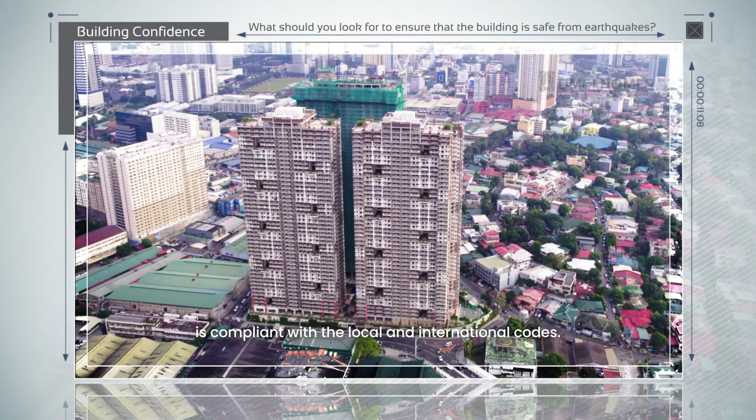The buyer should ensure that the property is designed by a reputable licensed structural engineer, and at the same time, dapat built din siya ng isang experienced and licensed property developer to guarantee that the structure is compliant with the local and international code. How high is the magnitude yung kaya ng residential building?

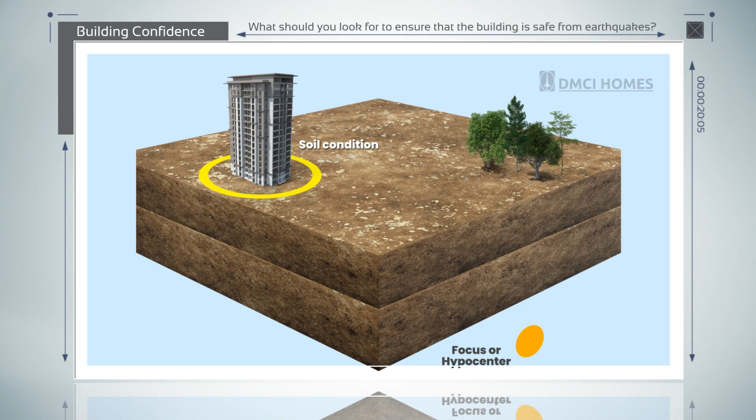What's the National Building Code of the Philippines? That's PD 1096. Up to now, it's still the prevailing national code of the Philippines. Yung purpose of the National Building Code, number one, is to safeguard life, property, yung public welfare ng mga tao. And of course, to provide yung minimum requirements for us to be able to regulate and control yung design.

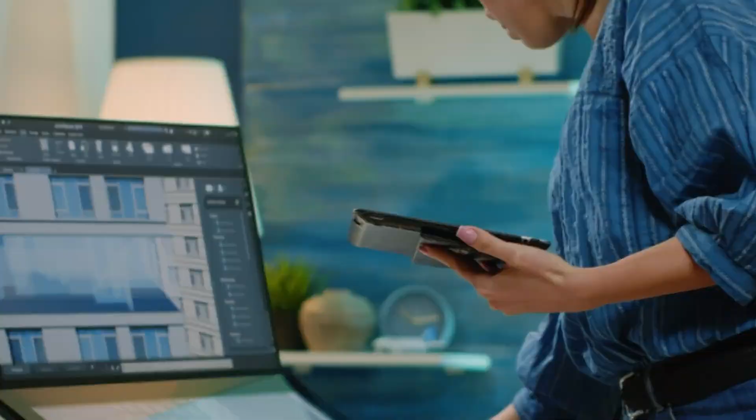What is the difference between the NBCP and NSCP? Yung National Building Code embraces everything. May maliit na part doon about the structural, the NSCP. The NSCP is the main referral code used in structural design of a building and even on vertical structures here in the Philippines. It contains provision to seismic resistant structures.

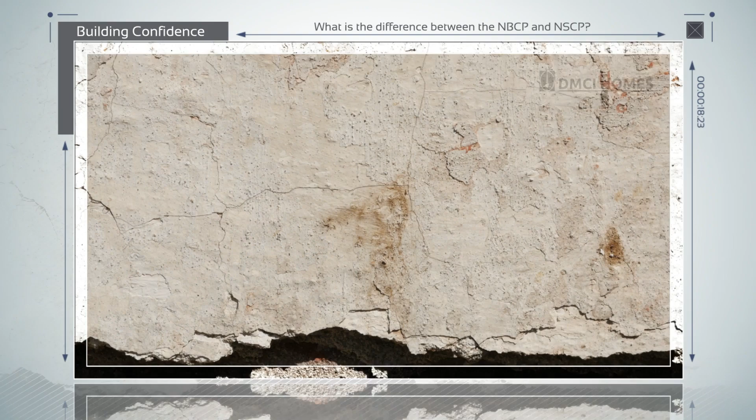It does not mean na zero damage yung mangyayari once na ma-hit siya ng earthquake. So the NSCP anticipates that under severe earthquake, structural damages may occur, but these damages should not lose life and property. So yung seismic resistant design, it is not applied to all members or components ng isang structure. It is basically applied to select members that act as part of the main lateral resisting system ng isang structure.

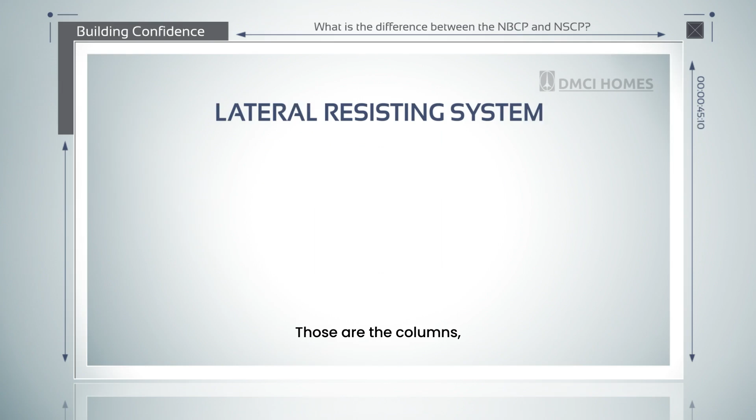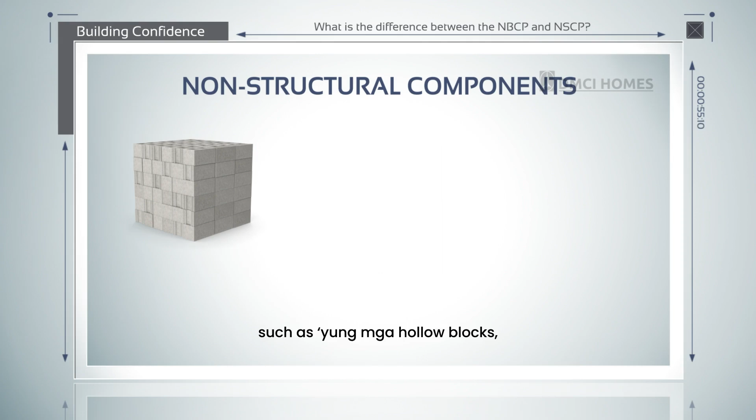Ano ba yung mga lateral resisting system? So those are the columns, shear walls, beams, girders, and slabs. The non-structural components, such as yung mga hollow blocks, yung mga partitions, yung mga ceilings, yung mga floor and wall tiles, glass windows, and other similar building components. Yun, hindi siya part ng lateral resisting system. So therefore, they are not earthquake resistant.

Then we start off with looking at the architectural plans. That's very important that we get the geotechnical investigation or soil report early. Pag yung structural system na yon is one of those listed in the NSCP, then pwede kami to just use yung tinatawag nilang prescriptive based design. Linear analysis lang yun. If it doesn't fall under those listed in the code, then we have to do non-linear analysis. Dun pumapasok naman yung PBD.

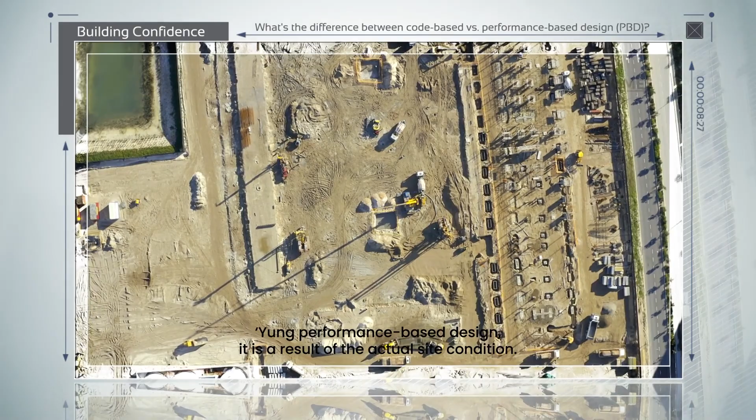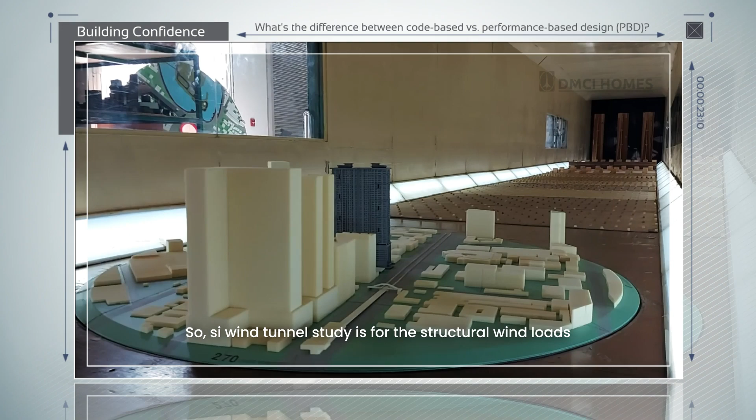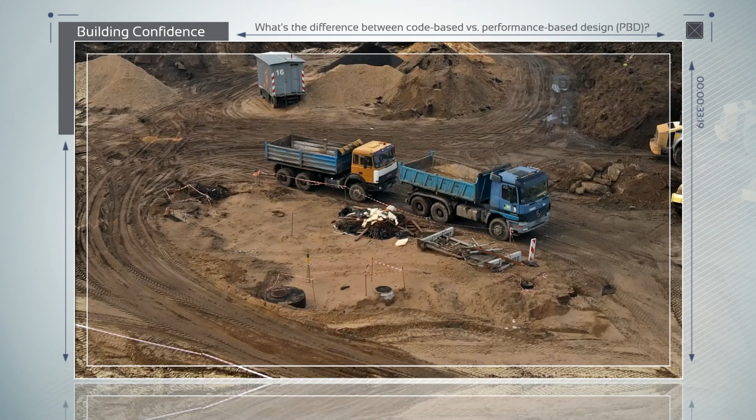What's the difference between code-based against performance-based design? Si code-based design, more on prescriptive design siya. By the book, kumbaga. Yung performance-based design, it is a result of the actual site condition. So, kailangan natin doon magkaroon ng testing for wind tunnel study saka nung probabilistic seismic hazard analysis. So, si wind tunnel study is for the structural wind loads, and then yung isa naman, si PSHA, is for the earthquake conditions naman siya. Si PBD, on actual site condition yung product niya compared dun sa prescriptive na by the book.

Why do we talk to consultants? Our consultants and partners are not only renowned in the industry, but they also have valid licenses and maintain a good standing membership dun sa Philippine Institute of Civil Engineers, Association of Structural Engineers of the Philippines, the Institution of Specialist Structural Engineers of the Philippines. May ensure natin na kapag yung consultant natin is part ng mga credible organizations na yon, they will bring a high level of expertise and credibility.

Also, we tap international consultants such as AIT Solutions para mag-conduct sila ng peer review naman. Again, ang product nun is not only code compliant but also optimize yung product na mapoproduce natin. Should you worry about hairline cracks?

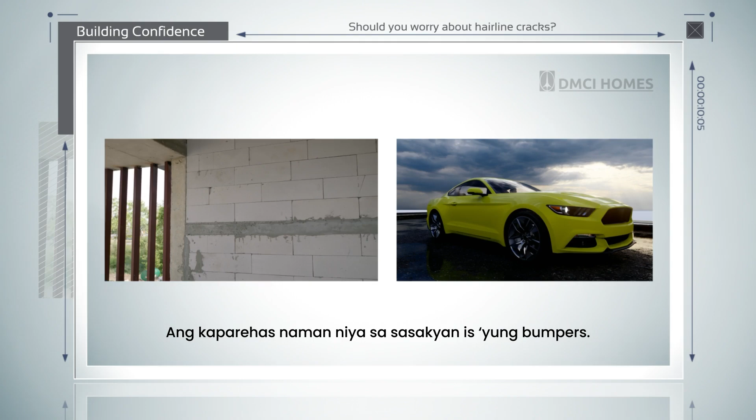Safe and sound. How do engineers make sure that the building is safe for occupancy after an earthquake? After a strong earthquake event, the structural elements of the building are inspected by a licensed or qualified structural engineer to decide whether kung pwede ba siyang i-occupy pa or magkaroon siya ng restriction for occupancy. In the event na nabanggit ni structural engineer na kailangan siyang lagyan ng occupancy restrictions, dun yung time na kailangang i-retrofit or bigyan ng strengthening yung building if nakitaan dun sa analysis niya na kailangan.

From a structural engineer's view, how safe are DMCI Homes condominiums? DMCI Homes is a very responsible company. Based on our dealing with them, we've been with them for 14 years already. And so far, they also listen to us, their consultants, on structural matters. And we appreciate that.

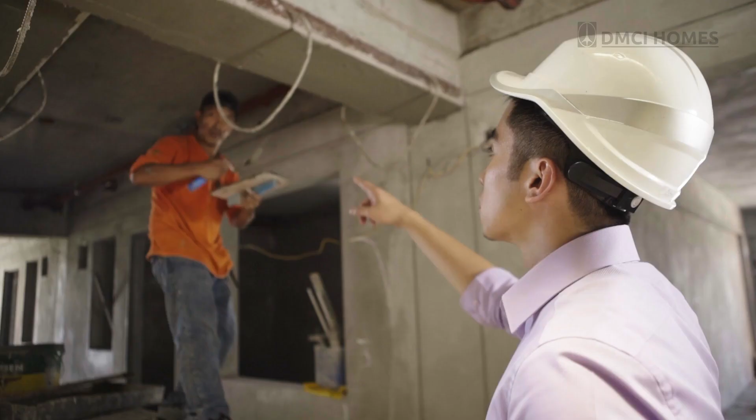DMCI Homes strictly follows the prevailing building and design codes. Key factors that make DMCI Homes condominiums safer are solid foundations, flexible designs, and high-quality materials. These elements work together to help buildings absorb and withstand the shock of an earthquake. After an earthquake occurs, thorough inspections are conducted to ensure that the buildings are safe for occupancy. This process can be thought of as a comprehensive health check for the structure. Quality and safety are highly prioritized in DMCI Homes. Built with meticulous planning and adherence to strict codes, our buildings are designed to be safe against earthquakes and other natural calamities.